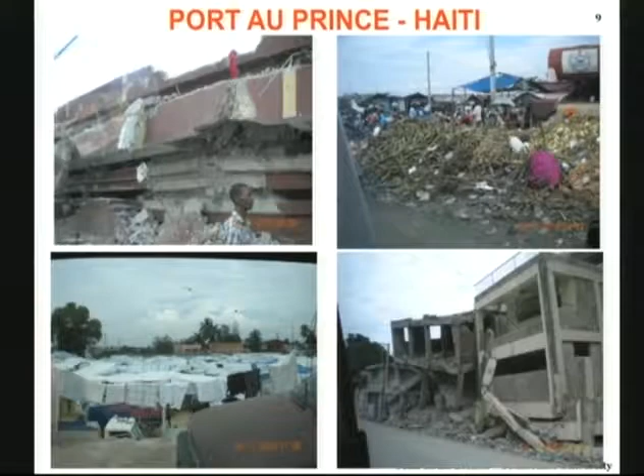Why be a member of ISSMGE? Well, it's pretty obvious. You want to help the profession at the international level. How to join? You can contact me, I guess. I'll give you more details.

Toronto, October 2011, is the Pan American Conference. This is going to be a big one, and I would urge you to consider coming to this conference. And then the next international conference is in Paris in 2013, and that should be a lot of fun.

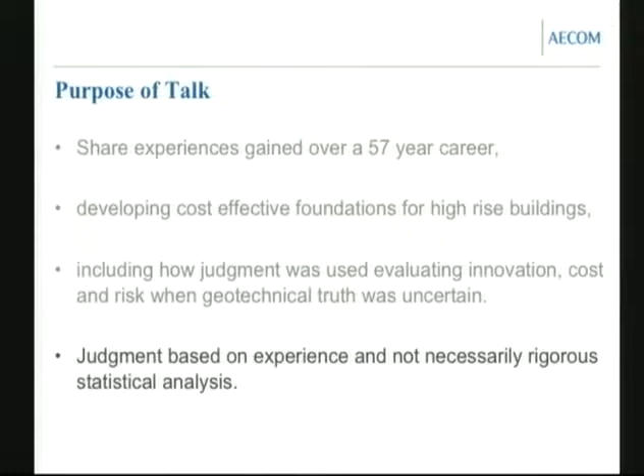Purpose of the talk: to share experiences gained over a 57-year career, which I guess now is 58 years, developing cost-effective foundations for high-rise buildings. That's what my experience has been, having been in the Chicago area for so long. Including how judgment was used evaluating innovation, cost, and risk when geotechnical truth was uncertain, with the judgment based on experience and not necessarily rigorous statistical analysis. You will see that I'm more of a practical guy than theoretical.

The major portion of my career has been spent in Chicago, which is very fortunate if you're interested in foundation design for high-rise buildings, because there are so many high-rise buildings in Chicago. One time I think we had 3 of the 4 tallest. I followed Ralph Peck in Chicago and gained from Peck's experience. You'll notice I'm wearing a bolo tie, and Peck often wore bolo ties.

The softest till sheets are naturally near the surface, and they get denser as you go down. This is a picture showing the Chicago profile and all the different foundation types that we use in Chicago. I think it's a great picture and a great profile because we use all these different foundations, and we have problems, and the geology is such that we can explain the problems.

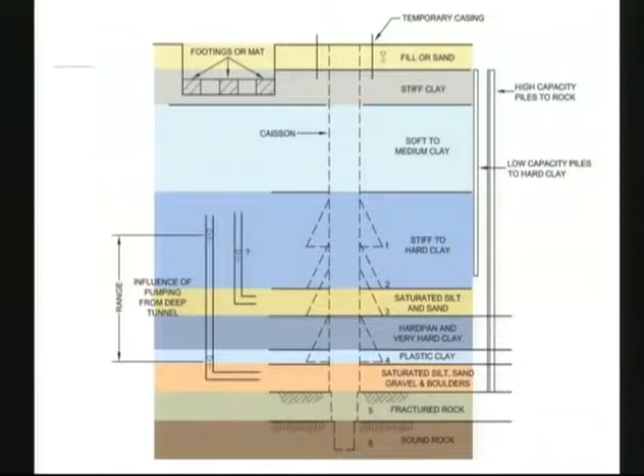At the different till sheets, we sometimes find water-bearing deposits which can blow in on us suddenly. Then we get down below the hardest hard pan, we have more water-bearing deposits, and then fractured rock, and then good dolomite.

Fortunately, because the clay takes time to consolidate, they were able to keep maintaining the building, repairing it, keeping it up so it looks pretty good. Today, you look at it, you don't know it's settled so much until you walk into it, and you step down to walk into it.

So caissons were used mostly for heavy buildings starting shortly after 1900. Then about 1919, there was a lot of concern with the bearing pressures that they were using. They were using like 12 KSF bearing pressure for the caissons. So D'Esposito, at the Northwestern Union Station, decided to run a load test.

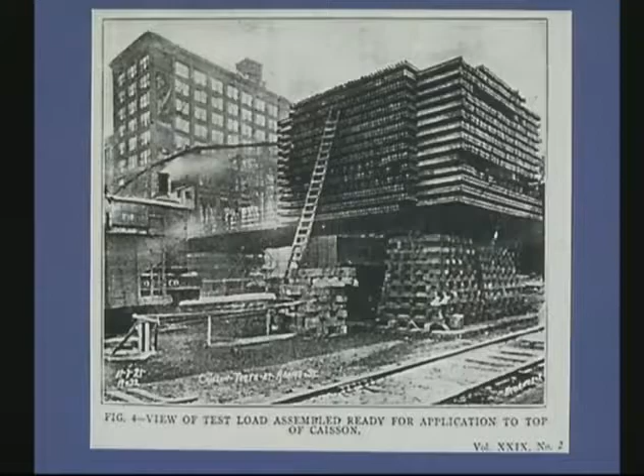This is a major load test for that day. Again, this is still very early in soil mechanics. You can see what was required to run a major load test. In those days, it took a long time to run the load test. Today we run them pretty quickly, but back then it took a couple of months to build up the load. They got it loaded up on the hard pan to about 65 tons per square foot.

But they were pretty smart, even back then, and they asked how much of the load was carried in side friction. So they dug a shaft down to the same level as the bottom of the test shaft, dug under it, and created a cavern under it, then reloaded it to see what load it could carry, subtracting that from the bearing, and still came up with some very high bearing pressures. You would think, oh boy, now we can really up the bearing pressures on Chicago hard pan.

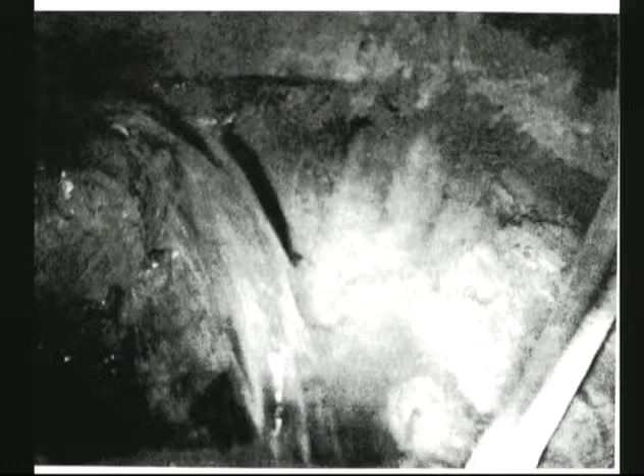Unfortunately, the 20s came along and they started building all of these 40-story structures in Chicago. All of those structures could have been supported on the hard pan, except that above the rock, and sometimes at the hard pan interfaces, you can have blow-ins of water washing in sand and silt. The experience when that first happened was that you could see ground settling adjacent to these blow-ins. Then people started to realize, hey, I might save a lot of money, but if I put my building on hard pan and somebody next to me goes down to rock, it could undermine me and cause a lot of settlement.

So in the 20s, during the big building boom in Chicago, all of those buildings ended up going to rock, and they didn't use the information they'd determined from that high load test. So then what happened? Well, nothing was built during the Depression, right? Then post-World War II.

What did we learn and how did we advance? Well, pre-1948, the allowable bearing in cohesive soil in our area was just determined by the unconfined compressive strength. Then with the Terzaghi-Peck book in 1948, the formulas shown there gave an allowable bearing pressure in cohesive soil of about 1.3 times the unconfined compressive strength for individual shafts with bells.

Then about 1955, Skempton came along with his research showing that for deeper shafts, you could go up to 9C, nine times cohesion, for the bearing capacity. If you use a factor of safety of 3, that's 1.5 times the unconfined compressive strength. And if the soil has sufficient granular component to have an undrained friction angle, you can maybe get higher values using triaxial compression tests.

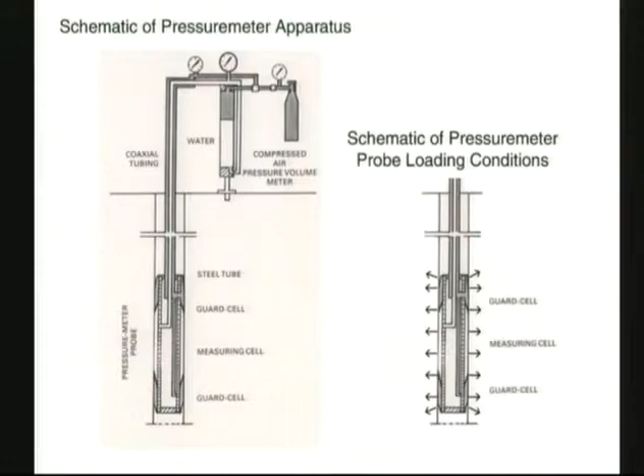We always like to see an unload-reload cycle. When we do it, we go up to the creep pressure, which is when you start to get additional deformation in the 30 to 60 second loading range, and the curve starts to curve up. That's defined as the creep pressure. Then we run an unload cycle and a reload cycle, and you get two different modulus values. In our geology, we've observed that alpha, the ratio of those modulus values, is an empirical factor that you can use very effectively.

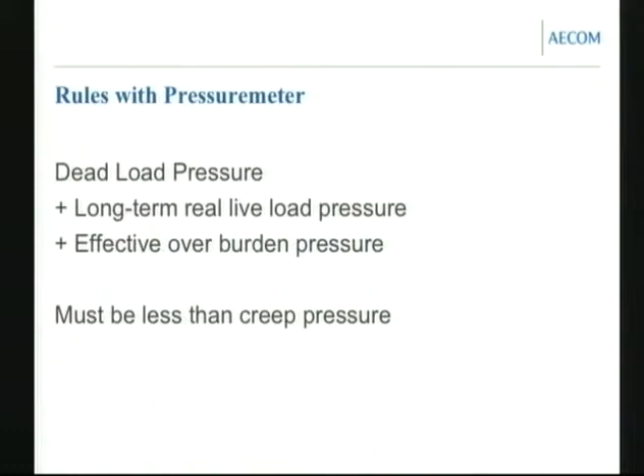Now, the rules with the pressure meter - these are the rules that we follow. We like to keep the dead load pressure plus any long-term real live load pressure, plus the effective overburden pressure, to less than the creep pressure. Now why do we want to do that? That's so we can predict the settlement reliably.

We could perhaps go a little bit higher than that, but when the stress levels go above the creep pressure, you start to get plastic creep, more than just elastic movement. So the formulas that have been developed assuming you're in the pseudoelastic range no longer apply.

Settlement theories using the pressure meter data - well, the two most common approaches are that used by Menard, who developed his procedures based on a lot of load test data that he had, and then the other approach is just the elastic approach, where you have to come up with an elastic modulus and just use elastic theory to predict the settlement.

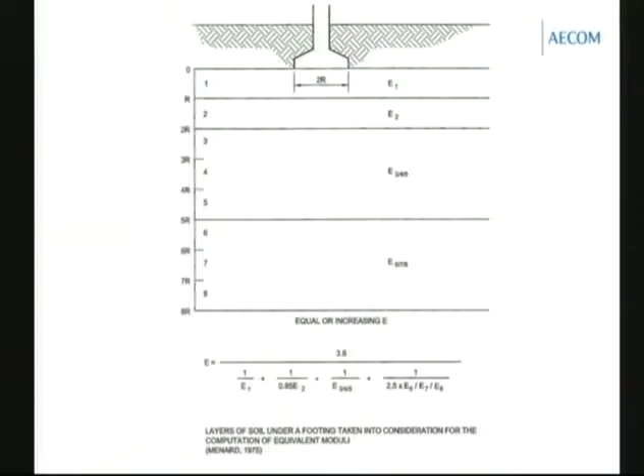Now, you can study these things later, there's not enough time to go into detail on this. But you can see Menard divides his soil up into different layers, and his formula takes into account, in a progressive way, the deformation in those layers.

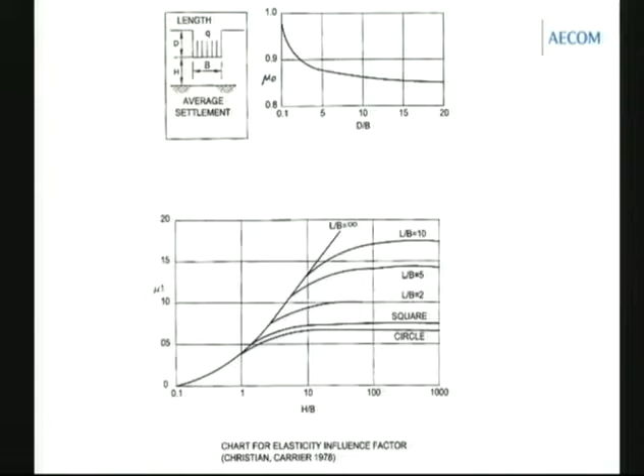And in the elastic theory approach, the settlement is just based on the geometry factors times the width times the pressure divided by the elastic modulus. The geometry factors are determined by these charts - I've got them called here Christian Carrier charts, that's where I got them from, but you can find them even earlier in other textbooks.

Pressure for more cost-effective foundations. Okay, we've got this method now where we can test the ground in situ with the pressure meter, and there's a desire to minimize the cost of foundation elements below ground that can't be seen. People want to spend the money above ground where they can see it, and not waste the money below ground where it can't be seen. That's very normal. And with the increasing role of the developer, this became even more significant.

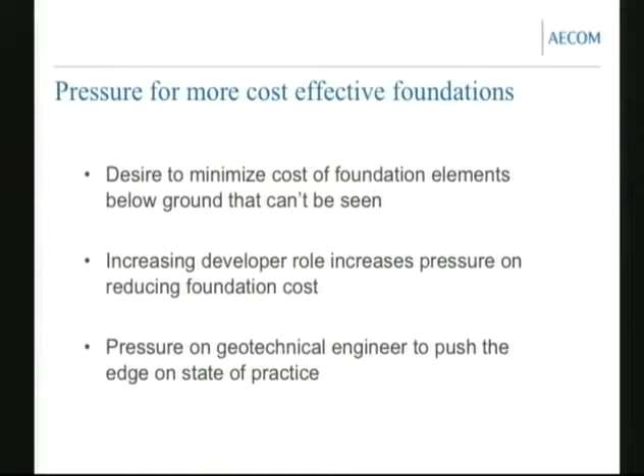More pressure to increase the bearing pressures, reduce foundation costs. And that puts pressure on the geotechnical engineer to push the edge on the state of practice, and that's where we are. Now, there's judgment required in evaluating geotechnical uncertainty and the risks involved with ideas for reducing foundation costs. We have to look at those ideas, but we have to weigh the risks, and use our best judgment in coming up with cost-effective foundation solutions.

And in all cases, we need to know our local geology and building history. We can learn an awful lot by calibrating to past performance in other buildings. And then keep in mind, we may not know as much as we think we do, and I'll illustrate something of that in my own experience.

Now, the different ways to reduce foundation costs: maximizing allowable bearing pressure, using a mixed foundation system, reusing existing foundations, using highly stressed piles as settlement reducers, and finally having a remediation plan for construction surprises.

These systems depend on being able to reliably predict your settlement. In my early days, structural engineers didn't want to mix foundation systems because they didn't have much confidence in our ability to predict the settlement.

Now we're much better at it, and we mix foundation systems all the time. Here's examples of not knowing as much as we think, and I've been involved in both of these.

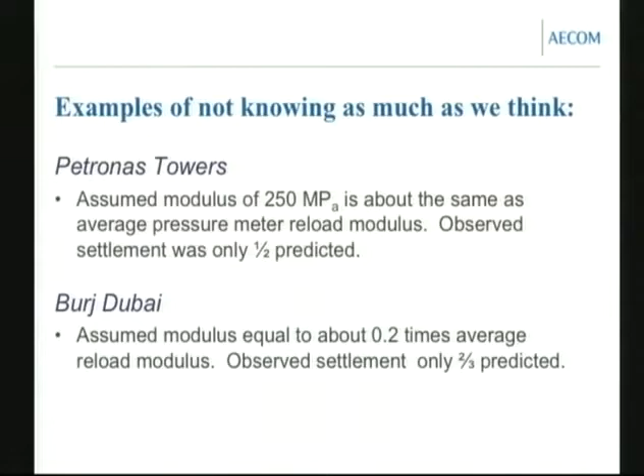The observed settlement came out to be about two-thirds that predicted. Now, if we had used our procedure that we had found successful in Chicago, the same procedure used at the Petronas Towers, we would have been way off. We would have under-predicted the settlement because the unload-reload ratio to the initial ratio at Dubai was about 10 to 1, rather than about 2.5 to 3 to 1 as it was at the Petronas Towers.

If we had just said, okay, we will use 3 times our initial modulus for Young's modulus, we would have been much closer on both cases. But our procedure was to use the unload-reload modulus, and you can see how we would have been way off if we had done that on Burj Dubai.

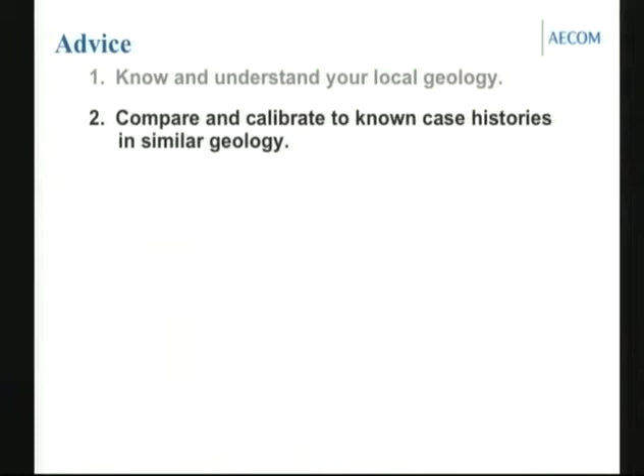Know and understand your local geology. Compare and calibrate to known case histories in similar geology. The geotechnical engineer and the structural engineer should develop the exploration program together. Perform simple bearing capacity and settlement analyses before more sophisticated finite element programs, and then perform an instrumented load test program to failure when practical.

You always want to load to failure ultimately, if you can, to really learn something. If you only go to 2 times your design load, all you learn is that, yes, you're safe going to 2 times the design load, but you haven't really learned a lot about the properties of the deposit.

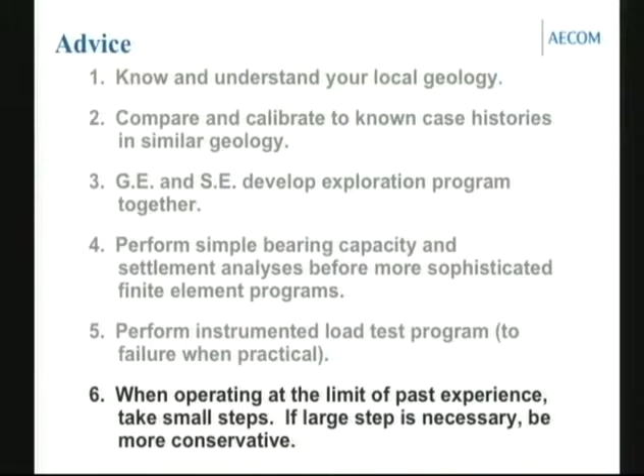When operating at the limit of past experience, take small steps. If a large step is necessary, be more conservative. Require a pre-construction contractor conference or consultation. Remember, design must be buildable. It's always important to get the contractor's input in that.

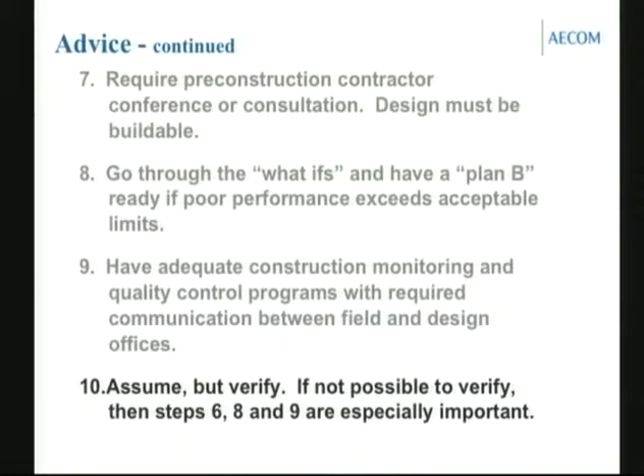If you've come up with an idea and you're pretty confident it's going to work, but there's a possibility it won't, you better have a plan B ready. Go through the what-ifs and have a plan B ready if poor performance exceeds acceptable limits. Have adequate construction monitoring and quality control programs with required communication between field and design offices. And then assume but verify—it is always good to verify your assumptions. If it's not possible to verify, then you've got to be more conservative.

Now, selective case histories to illustrate these different points on cost-effective foundation solutions—there are 5 that I'm going to show, and they illustrate different things. The first one is the AT&T building.

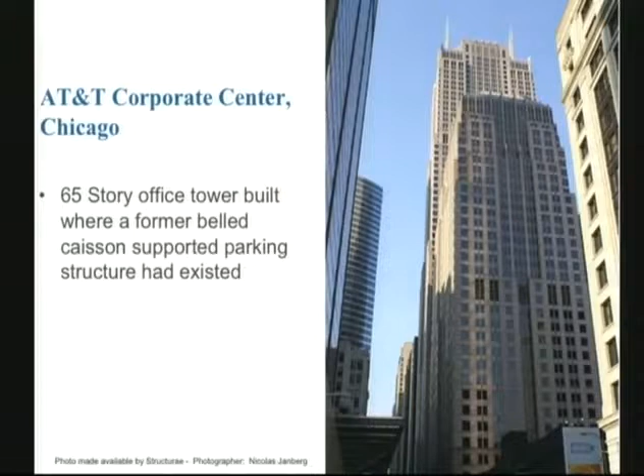This is a 65-story building, built where a former belled caisson supported parking garage structure had existed. In urban environments where you're putting up new tall buildings where old buildings were already there, you have a problem with the existing foundations. In a couple of the cases we're going to talk about, we reuse the existing foundations. Here, it wasn't possible to reuse the existing foundations, but they were in the way.

The bells are down in this hardpan layer, and of course that's where you want to sit with your new bells for a much taller structure. But you've got your existing caissons in the way. So in some cases you can go under them and get them in the hardpan. In other cases you can't go under them and stay in the hardpan—you'd be down in this water-bearing, very dense silt, sand, and gravel.

So what do you do? Well, one possibility is to put it on piles or caissons to rock. Unfortunately, the developer didn't have the budget for that, so that wouldn't work. So he asked, is there anything else we can do? We said, well, if we can dewater that water-bearing silt, sand, and gravel, we can still put the bells there. So filtered dewatering wells were used to lower the waterhead in that deposit, and it was successfully completed.

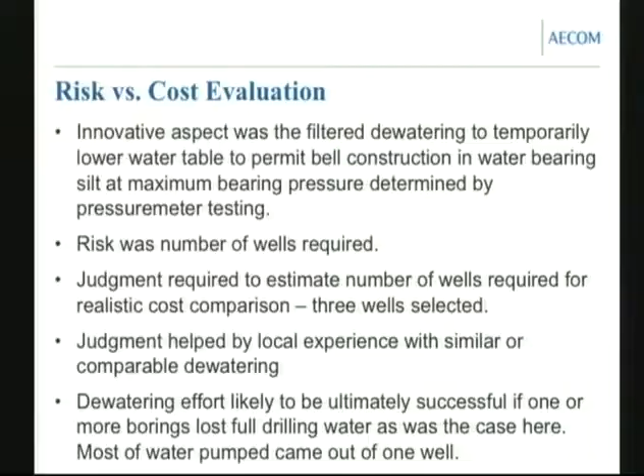What were the risks in using this solution? Well, if the filtered dewatering wells hadn't worked, we would have been in trouble—we would have had to use more wells to pull the waterhead down. But our judgment based on past experience was that the 3 wells we put in would be sufficient, and in actuality 1 well turned out to be really sufficient. We put the wells in where, in the borings, we had lost all of our drilling water, so we knew it was very permeable, and that's what you need if you're going to try that.

You need a permeable deposit that you can pull the water out, that'll extend over the site. The next one is very interesting because it was a challenge.

The developer wanted to build a new office building at the same site where an existing 11-story building had been supported on caissons, and he wanted to know how tall he could build on the same site. One of the problems was the existing building's caissons were so closely spaced that they almost took up the whole site, so you couldn't put in new caissons underneath old caissons like we tried to do at AT&T. But there was a 3-level basement on this site.

So the idea was, if we take advantage of that 3-level basement excavation—the amount of soil and weight that had been removed—and then put a mat over all of the existing piles, we could build on that combination of mat on existing piles, taking advantage of all that load that had been removed in the basement excavation.

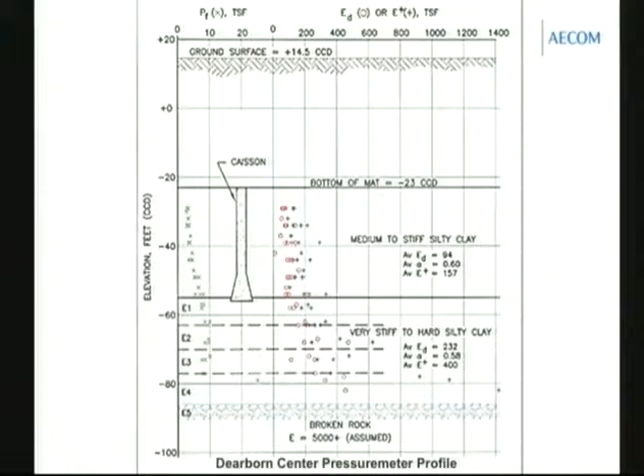Using the pressuremeter data, we calculated the maximum sustained load that can be carried by existing caissons without exceeding the creep pressure. Now, these were 100-year-old caissons, designed long before the pressure meter existed. We thought, using our pressure meter today, we could probably load them higher than they were originally designed for without exceeding the creep pressure—and that's true, we could.

So we determined that amount of settlement to be about 1 inch, then calculated the amount of pressure the mat can take for a comparable settlement, and combined them. Combined loads at equal settlement represents the maximum sustained building load that can be applied. Using that approach, we went from the 11-story original building to a 38-story new building.

How did it actually work out? With the full structure dead load in place but the live load not yet in—estimated at 70% of the total design load—the predicted settlement would be about 0.7 inches. It was all based on a 1-inch total settlement, with a range of maybe 5/8 to 3/4 of an inch.

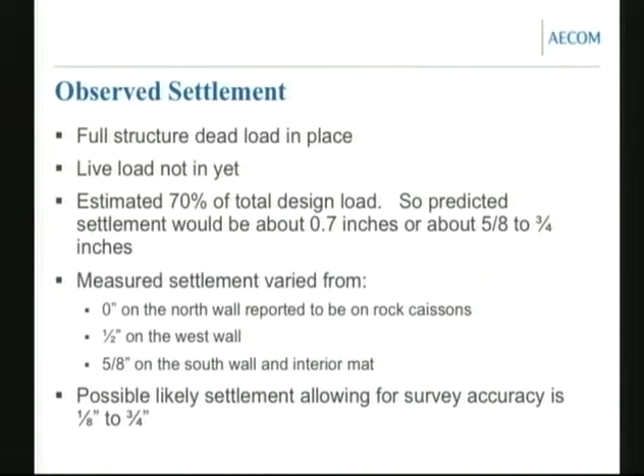The measured settlement varied from 0 on the north wall, which had rock caissons, to about 1/2 to 5/8 inch in the rest of the project. Allowing for surveying accuracy, the real settlement was probably between 1/8 inch on the rock caissons to 3/4 of an inch elsewhere—so the right ballpark for most of the project.

Now, what are the risks? I can tell you the project worked out very well, but what are the risks? The principal risk was under-predicting settlement—existing caissons could be pushed into the ground with pressures exceeding the creep pressure, making them act like settlement reducers. And with a corner of the building on rock caissons, excessive differential settlement could require supplemental micropiles in the mat and/or stiffening walls to control differential settlement, perhaps even both. Judgment was that the value saved by the combined foundation design was worth the risk.

South Side office building. You can see on this previous one we're reusing existing foundations. Now this South Side office building illustrates using settlement-reducing piles in an unusual way, and you'll see what I mean. On this project, it's only 10 to 12 stories—it was going to be 12 stories ultimately, but initially only 10 stories, and it's built.

There's a sand layer, then a stiff clay crust, then fairly extensive, very soft clay. And where we would normally have hard pan, there wasn't any. Instead there was a thin layer of stiff clay, and then very dense water-bearing sandy silt. So the desirable plan of putting in belled caissons couldn't work because of the possibility of a blow-in from the water-bearing sand and silt below.

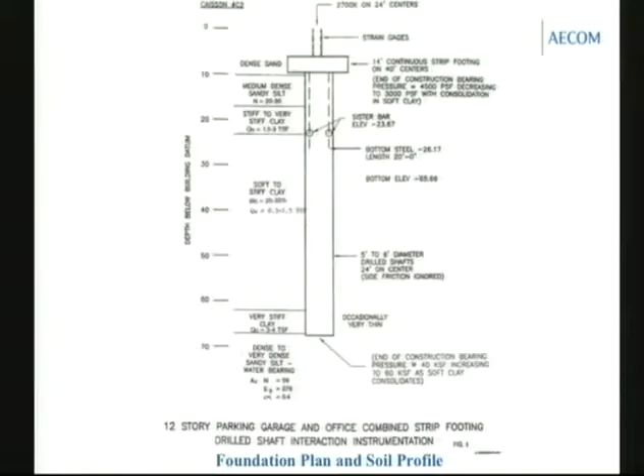But if we could go down with a straight shaft to this very dense deposit, we had run pressure meter tests down there, and with the concept of settlement reducing piles, you can allow that load down there to go up close to failure, because you're not relying on the pile as a structural element.

The idea when you're using settlement reducing piles is that the purpose of the piles is to reduce the settlement, and the project would be safe without the settlement reducing piles—you're just using them to reduce settlement. The reason why that's important in Chicago, and anywhere really, is if it's a structural element, it has to be load tested, and load tests slow down the project and add a lot of cost. If it's just a settlement reducing pile, you look at it as ground reinforcement, not a foundation element that has to be tested in the same way.

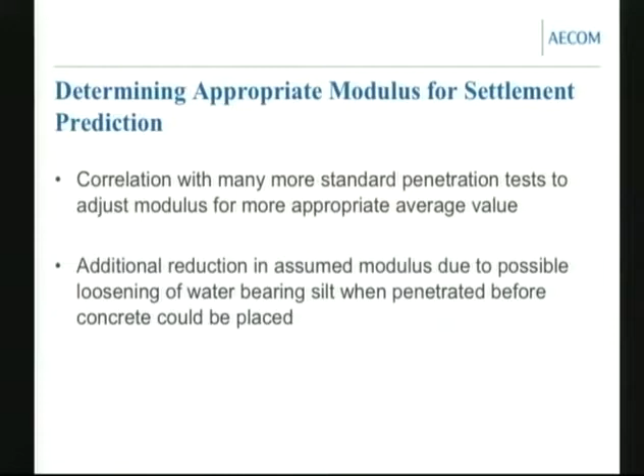We instrumented two shafts—one was at the edge of the footing, and another was an interior shaft. And it's interesting to see that, normally you would think the interior shaft would settle the most.

In actuality, the edge shaft settled the most. And the reason is when you think about it, you don't have that footing extending beyond the edge shaft carrying its share of the load. You only have the footing in the other direction carrying its share. So you get major settlement at the edge shaft and less settlement at the interior shaft, where the footing is carrying more of the load.

The actual bearing pressure turned out to be under the edge shaft, calculated to be 76 KSF, and at the interior end shaft, a little under 50 KSF. Normally, if we were doing a design with the pressure meter and these elements were going to be designed as structural elements, we would have probably limited the bearing pressure to no more than 40 KSF.

So here, by considering these elements as just settlement reducers, we were able to go to much higher stress levels.

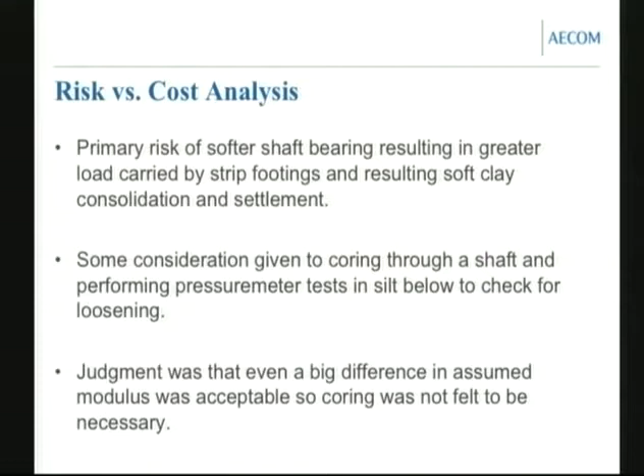Risk versus cost analysis: the primary risk of softer shaft bearing resulting in greater load carried by the strip footings, resulting in soft clay consolidation and settlement. Well, why didn't we core through a shaft and actually see what it was like below? Some thought was given to that, but we finally decided we'd been conservative enough, and that we could go forward without taking the time of doing that additional coring through a shaft and testing below it. I suspect we were under a lot of pressure by the contractor and developer at that point too.

111 South Wacker Drive. Now this was another one of these projects where there was an existing building - tells you what happens when you're in the business long enough. The building that they tore down, I was the original geotechnical engineer on. I was the guy that went down in the caissons to look at them and say that they were okay. In those days, the engineers went down in the caissons, didn't send a technician down. We went down and looked.

So we came up with a plan that involved putting a mat over those existing caissons and enough new caissons that would go down to the hardpan, that in combination with the existing caissons, they'd have to go below the existing caissons. And actually, by going below the existing caissons, they got into better hardpan. The question was, do we have enough thickness above the water-bearing silt? And we did.

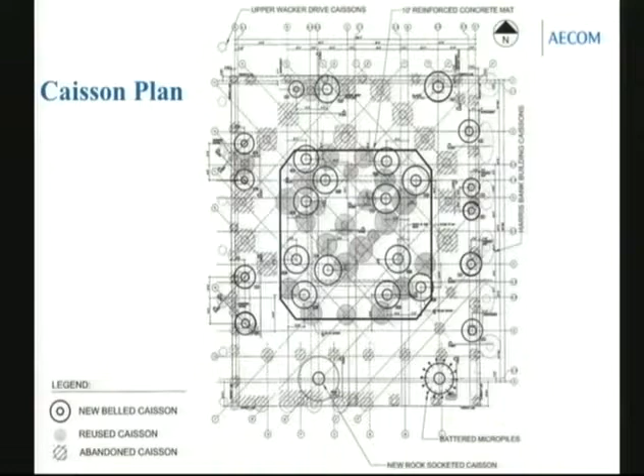Problems and remedial action. I mentioned the unanticipated water problems encountered at 2 caissons and how we resolved it. Now, the interesting thing is the 14 rock-socketed micropiles in Chicago - if you use piles, you have to load test them. So we didn't load test them because we convinced the city that they were just supplementary, and that we were using them as settlement reducers, because we calculated the elastic compression in the steel of these micropiles, and it was sufficient that the amount of settlement would, at a reasonable bearing stress level, be in balance with the as-built caisson, so that it would work. We convinced them that we didn't have to do the load testing of the micropiles.

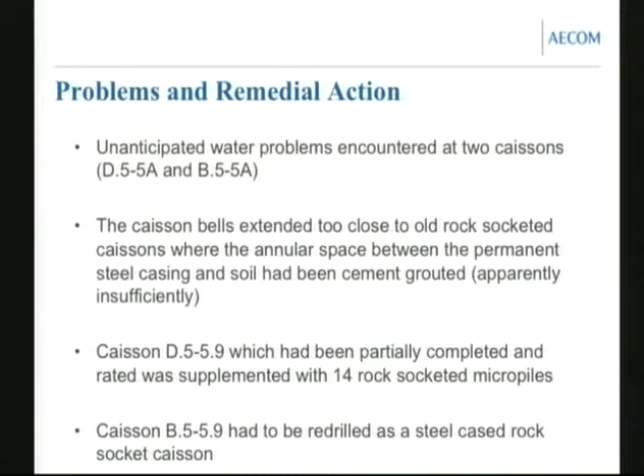On the rock caisson case, we don't have to load test rock caissons. You do have to case them, permanently case them down into the dolomite, and test the dolomite, and that was done on the rock caisson.

How did it all work out? Well, it worked out very well. The settlement predictions were typically 1 inch or less, and the observed settlements were typically less than 1 inch. And it was interesting - where would you guess the maximum settlement was that was measured?

It was on the caisson that went to rock. Now, how can that be? How can the caisson going to rock have the maximum settlement? Well, it's always possible in our dolomite to have seams and fissures that are missed, and you can get a little settlement in closing up the fissures. When I say a little bit of settlement, that maximum settlement for that caisson - the total settlement was only 0.88 inches, so it wasn't a lot, and it compared with the rest of the project where the measured settlement was in the 0.5 to 0.8 inch range.

So everything fell into the same general ballpark. What were the risk versus cost evaluations here? The risk versus cost of reusing existing caissons were considered negligible, as complete as-built records were available. The risk of new caissons getting too close to underlying water-bearing silt and blow-in occurring - we didn't think that would happen, but if it did, we would have to use filtered dewatering wells to lower it, like we did on the AT&T building. But we didn't think it was necessary here, and it turned out it wasn't. The internal lateral blow-in that did occur wasn't anticipated, but you've got to have a backup plan, and we had a good backup plan for both caissons where the lateral blow-in did occur.

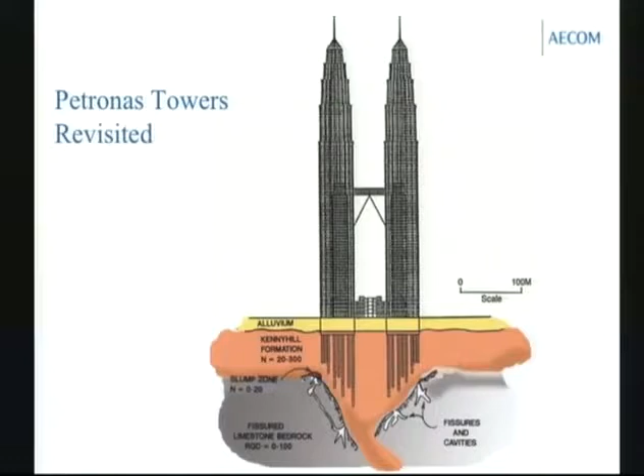In the Petronas Towers, we did a preliminary settlement analysis, what I call approximate analysis using approximate methods, and we came up with a predicted settlement, using the pressure meter data. We come up with a settlement calculation using the elastic theory of almost 60 millimeters. Then you've got to add the elastic compression in the shaft down to the equivalent footing level, which adds another 14 millimeters. The total predicted settlement using elastic theory then is up around 73 millimeters.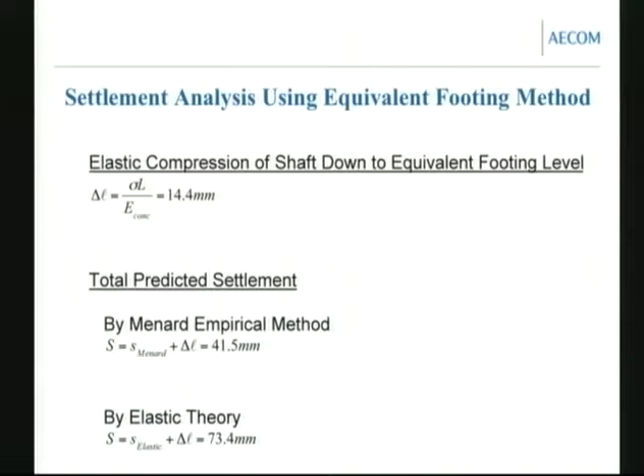However, using the Menard method and his empirical method, the total settlement came up to about 41 millimeters. Now, what was the actual settlement? The computer-generated settlements are also up around 70 millimeters, but for the computer-generated settlement, we had to do this differently - you couldn't do it by approximate means because of the sloping rock and everything.

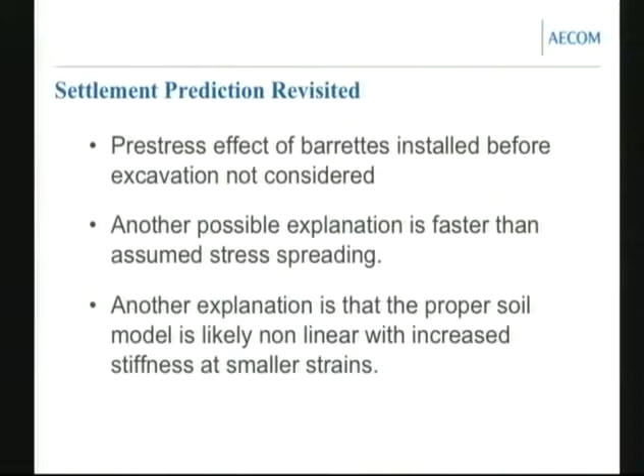Hindsight evaluation of cost-saving foundation idea: why not consider piles as settlement reducers and allow much higher concrete stress levels, with only slight increases in predicted settlement, with reduced concrete cross-section? We got very dense residual soils - our mat is sitting on very dense residual soils. We don't even need piles except for settlement. In other words, there's adequate bearing capacity, so it's sort of a perfect case for using settlement-reducing piles.

The factor of safety is adequate - I'm sure it would be more than 2 for a mat only. The problem is that using it as designed, using those piles as designed, following code allowables and everything, and the stress levels in those piles, we still just barely made it settlement-wise - just barely made it the half inch across the mat.

If we had increased the stress levels in those elements, let's say we could double the stress level in those elements - if we're now looking at those elements as settlement reducers or ground reinforcers, not necessary for the structure but just to reduce settlement - we could double the stresses in those piles, make them half as big. Well, of course, if you do that, the elastic compression in those piles has to be added to your settlement, and they're variable length piles. We would not have stayed within our half-inch maximum criteria across the site.

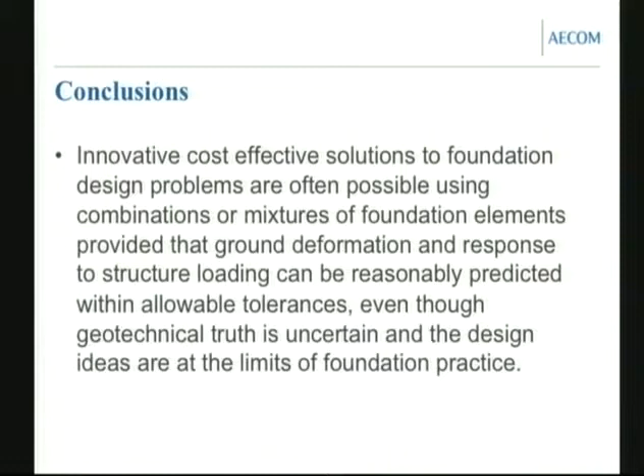Conclusions: innovative, cost-effective solutions to foundation design problems are often possible using combinations or mixtures of foundation elements, provided that ground deformation and response to structure loading can be reasonably predicted within allowable tolerances. Even though geotechnical truth is uncertain and the design ideas are at the limits of foundation practice, the key requirements are geotechnical engineer and structural engineer teamwork, knowledge of and experience with local geology and past building foundation performance history, or being more conservative where such information is not available.

Having experience with use and interpretation of in-situ pressure meter testing, or whatever method is used for predicting ground deformation under load in a particular geology, and having a plan for addressing geotechnical surprises. And then finally, being more conservative when assumptions can't be verified. The end.

Do you have any questions?

With pressure meter testing, you have the creep limit, that's lateral, radial lateral. Regarding Poisson's ratio, would you expect the vertical to be greater than lateral? I said I wasn't theoretical, I'm using an empirical method that works in a particular geology. We have professors here who could answer the theory, but I really can't. I understand the theoretical limitations that way. It is a lateral test, not a vertical test. But in soils with isotropic properties, at least, it's certainly been very, very useful, and we're using it all the time.

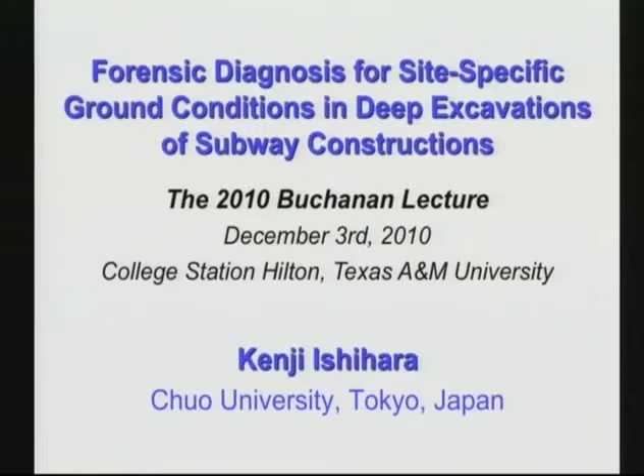And when I was the president, he made a proposal, and he was so enthusiastic and so outstanding, actually I had no choice but to accept it. Today's talk is entitled Forensic Diagnosis for Site-Specific Ground Conditions in Subway Construction.

As a matter of fact, in 2005, December 4th, there was a big accident in Kaohsiung in the subway construction. At that time, Dr. Wei Li was Secretary General investigating the cause of the damage, and he asked me to join the panel of experts in Taiwan. Then I accepted it, and I learned a lot from the accident.

And then in 2008, April, there was a conference, an in-situ conference in Taipei. At that time, everybody in Taiwan, geotechnical engineers, wanted to have this accident presented at the time of the conference. However, because I was considered a very neutral man, they asked me to make a presentation. So then I did some studies.

So this is the basis of today's presentation. In addition to that, I got a lot of information from Japanese engineers and from Professor David Hight on the collapse of a subway in Singapore. So these are the two big ones. The third one is another big one in Shanghai. So there have been three major accidents in the Asian region, or I must say, in the world in the 21st century, related to subway construction.

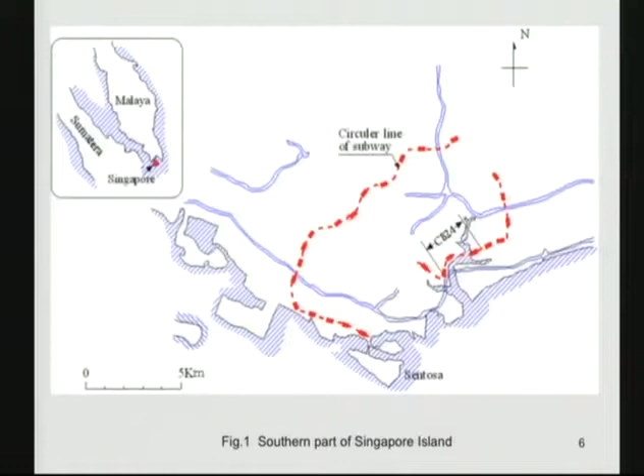The accident took place in this section in the new subway line under construction. This is an enlarged map. This is the Kallang Basin inlet to the south. This is the new line under construction, and the construction was under progress in this section, which is called Nicoll Highway. The collapse took place at this location.

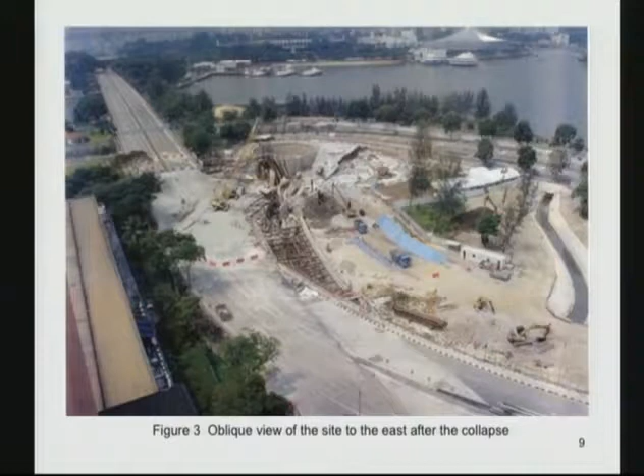This picture was taken immediately after the accident, which took place on April 20th at 33 minutes past 3 o'clock. Fortunately, there was not much traffic on this Nicoll Highway, so nobody died in this accident. However, in this portion, the workers were still struggling to recover from this accident, so they were involved in the collapse, and four persons died. This picture shows the detail of the collapse.

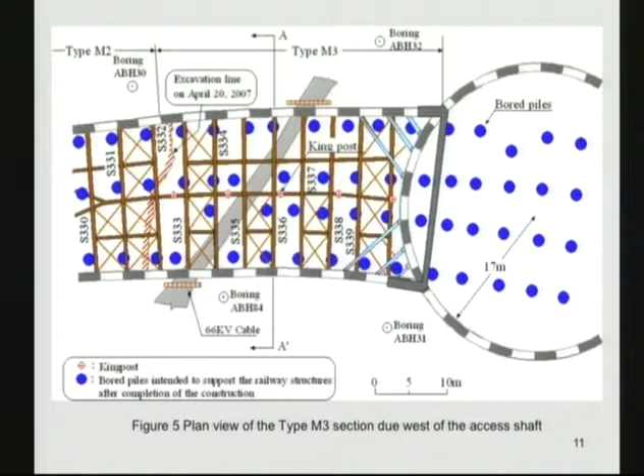First of all, engineers installed a diaphragm wall as well as the bored piles, and also there are two jet grouted struts. The upper one was to be taken away because the excavation was supposed to go down to a depth of this location. You can see two measures of the height.

This indicates the depth counted from the ground surface. In many countries, the elevation was taken at 100 meters below the average sea level, and the elevation counted starting from that 100 meters deep. So there is 6.9 meters, 4.2 meters, and so on. This is the elevation counted from 100 meters.

This jet grout is called sacrificial grouting. That means it is a temporary support, but after installing the steel bracing, it was going to be taken out by excavation.

At the time of the accident, 3:34 p.m., the scenery of the accident looks like this. As you can see, there is a huge amount of soil slid down into the excavated space. At 3:41 p.m., that is 7 minutes after the accident, everything looks like this.

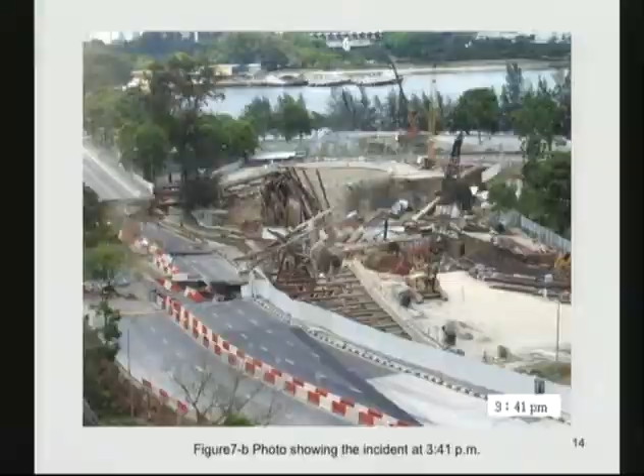Partly the Nicoll Highway was involved in this accident. These pictures show the spreading of different construction materials. There is an apartment house just behind. This picture shows the installation of the jet grouting from the ground surface prior to excavation.

Jet grouting has been used quite frequently, but its quality is very important, and its quality depends upon the skill of the contractors. At the time of the design and feasibility studies, several borings were performed to investigate the soil condition, for example ABH 31, 84, and also 30 and 32. The contour line was drawn based on the soil boring, which was performed at about 20 or 30 meters interval of distance, which is considered normal.

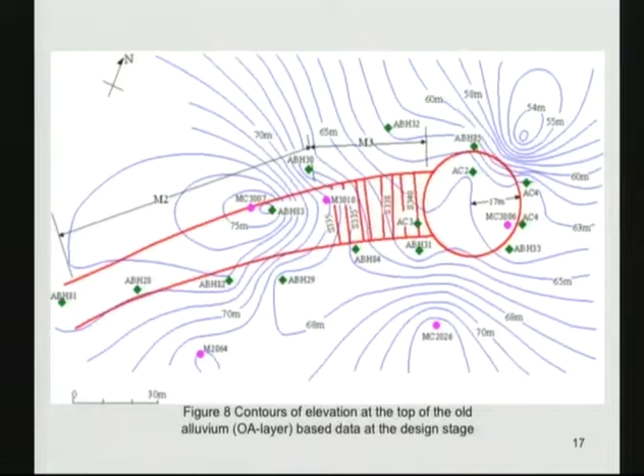If you look at the boring data on 30, located here, it looks like this, indicating fill materials near the surface underlain by silty organic clay, and further underlain by a very thick stratum of marine clay, designated by M. Then silty sand and silty clay layers exist below this, and an OA layer exists below this soft marine clay deposit. This was considered as a basis for diaphragm installation.

The other boring data, ABH31, located just here, indicates a similar ground condition, except that there are stiff materials in between, but overall this layer is considered the Kallang marine deposit.

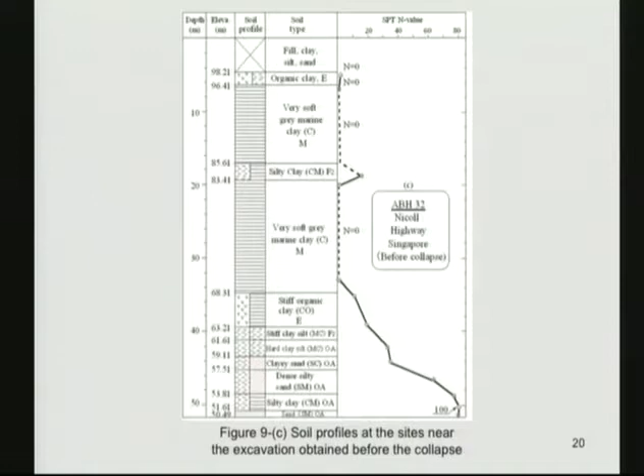The other boring data, ABH32, shows similar stiff materials in between, underlaid by a gradually increasing alternating layer of sandy silt and silty sand, called OA as a whole. This is ABH84, closest to the position of the failure. It is particularly notable that the depth of this bearing layer is deeper than the other portions.

So it is suspected that the diaphragm wall toe did not reach the stiff OA layers. According to the design, the diaphragm wall should penetrate 3 meters deep from the top of the OA layer.

After the failure, a lot of investigation was conducted, consisting of 2-meter interval borings on the northern side, and also along the southern alignment. There was a borehole where they encountered a lot of obstacles because of buried machines and so on. After the accident, everywhere was buried, and a new line was planned on the southern side.

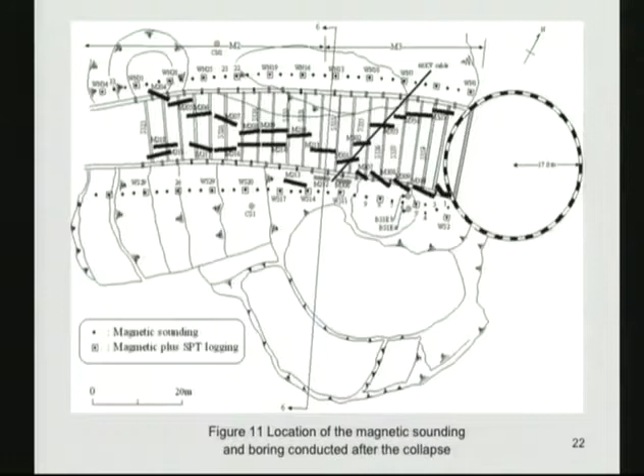So there was no exactly verified data regarding what kind of bracings and diaphragm existed. This is just based on surface observation of the diaphragm panel. These two were buried.

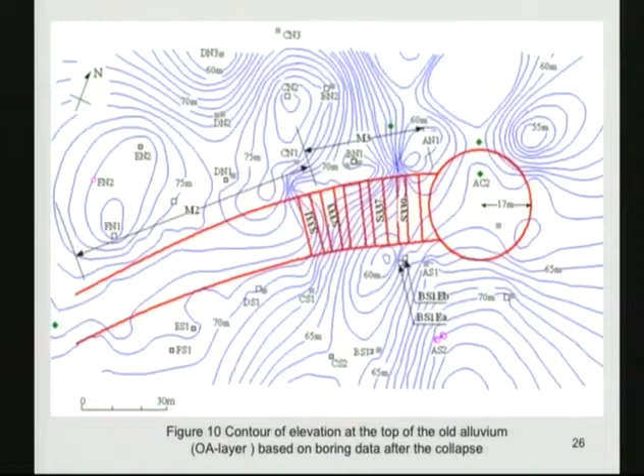After the accident, based on a lot of additional borings, contour lines were drawn again. If you compare the contour lines in the previous diagram with this one, it is apparent that there is a very steep slope in the buried OA layers along this way, extending towards the north. But this buried valley was missed at the time of the design and feasibility study. That was the major reason why this kind of big accident must have taken place.

After the collapse, several borings were made, and this is one of the after-the-event soil profiles, indicating a very stiff material, which might be hard cement, grout, or metals, and so on. This is a similar soil profile data after the accident. This also shows the same diagram.

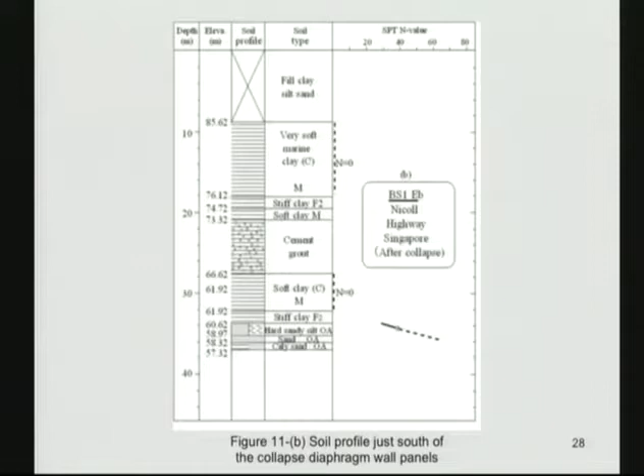So the toe-in, the length of the diaphragm wall penetrating into the stiff layer, was suspected to be the cause of the damage.

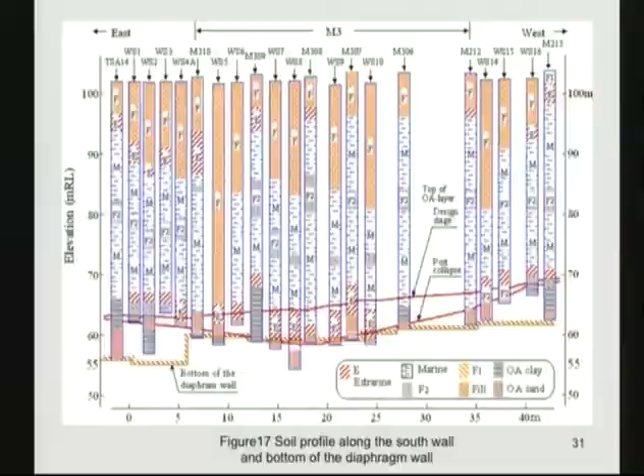So you can see the diaphragm wall penetrate pretty deep below the top of the OA layer. But if you look at the critical areas, there is an estuarine deposit designated by E here, and also this OA layer, but the strength was not good enough. So because of the lack of penetration of the toe of the diaphragm wall into competent material...

The movement of the toe must have taken place inward towards the excavation. On April 20th, 2004, excavation was going on from this area to here, advancing westward at this location at the time of the accident.

In the morning of the same day, there was the sound of metallic collision heard around here and here. But at 2 o'clock in the afternoon, the metallic collision noise became more frequent. So workers within these strutted areas started to feel the concern on this joint and so on, but it was too late, and the countermeasures were not helpful.

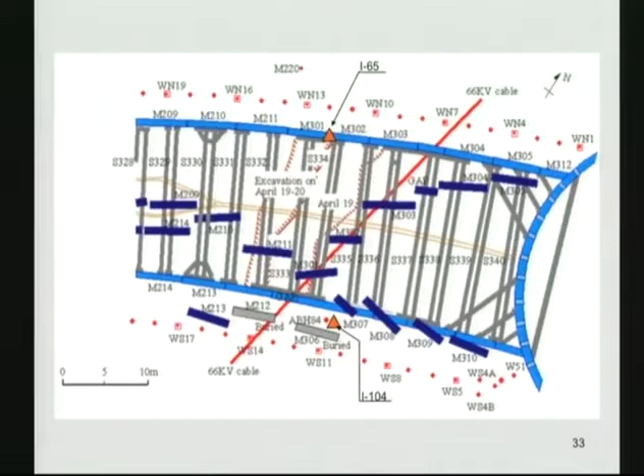There was an observation of the inclination at this location before the accident, and I will show you the records, which look like this. On the 17th of March...

Displacement of the strut started to increase, reaching a level of about 43.5 centimeters at this location on April 20th, at 1 o'clock in the afternoon.

However, we should be careful looking at this data. Normally, this is established based on the inclinometer data, which gives the angle of inclination. Based on this data, this curve was established, but assuming that this is a zero point...

So this is a very tricky distribution. Engineers at the site showed that this point must have moved further towards the excavation, bringing the toe of the diaphragm wall towards the excavation, and this must have been a generic cause of the damage.

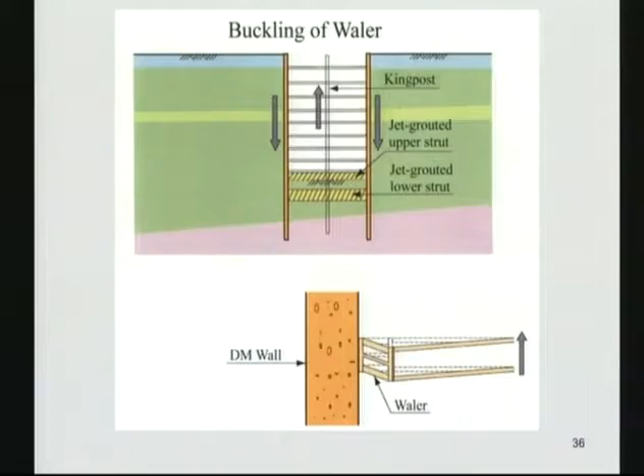According to the report of the Committee of Investigation, which was publicized one year afterwards, the cause of the failure was attributed mainly to the overestimation of the soil strength around here, and also the poor design of the sheet piles and strut and welding and so on, and the calculation was not so good.

But later on, in-situ engineers felt great doubt about this. So he invested a lot of money to investigate further site conditions by making borings.

This is the brace system before the accident. So one of the lessons we should take seriously is the connection between the strut and king post, which is normally rigidly connected here.

So if the king post goes up, the strut should go up also. And if the diaphragm wall sinks, the strut was bent, and there was some breakage at the connection. This is one of the bad experiences we should keep in mind.

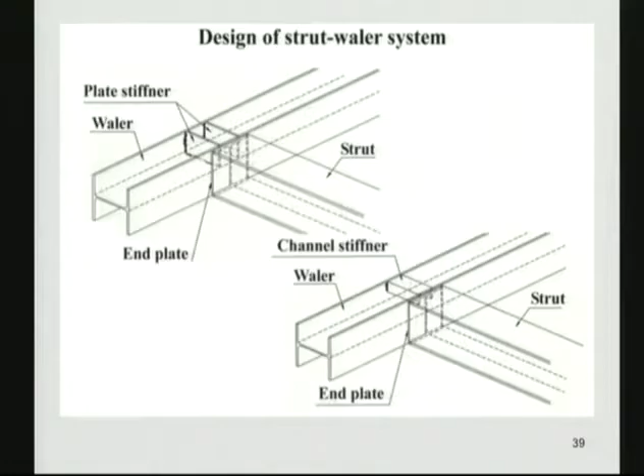So this indicates the configuration at the strut. In order to reinforce this connection, they put additional plate stiffeners in this fashion, and also channel stiffeners in this way, but it was not useful. One of the scenarios of failure is as illustrated here.

Because of the inward movement of the diaphragm wall, soil moved upwards inside, bringing the king post upward together, and then there was a disconnection, an imperfect disconnection between strut and walers. So this was the cause of the initiation of the damage.

So there are two scenarios. Scenario A is the larger earth pressures than assumed in the design. Due to the overestimation of the soil strength, the deformation was calculated smaller than actually happened, and then the collapse might have taken place because of the larger earth pressures than anticipated.

The other scenario, number 2, is what I explained here, based on the upheaval of the materials, bringing the king post upwards, and then there is the breakage in the connection. We believe scenario B appears to be more realistic. However, it is still under argument.

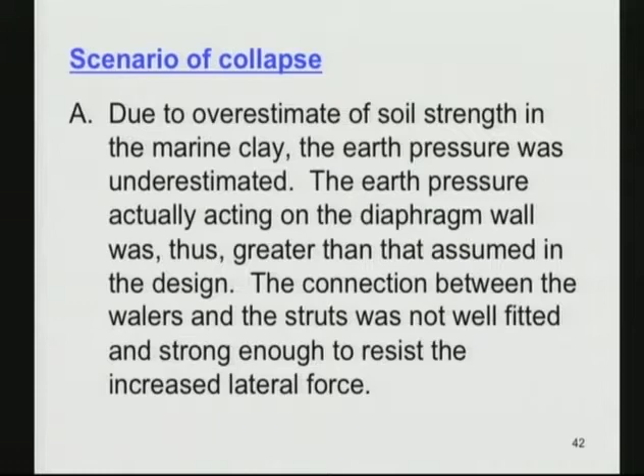The earth pressure actually acting on this diaphragm wall was greater than that assumed in the design. The connection between the walers and the struts was not well fitted and strong enough to resist the increased lateral force. The toe-in of the diaphragm wall specified to be 3 meters below the top of the stiff OA layer...

...appears to be achieved, but because of the presence of a weak zone near the top of the OA layer, the toe of the diaphragm wall moved inward, causing upheaval of the bottom of the excavation, accompanied by the lifting of the king post and also by the sag of the diaphragm wall itself. Thus, an offset was produced in the connection between the walers and struts, resulting in malfunction of the bracing system.

Okay, this is the end of the first story.

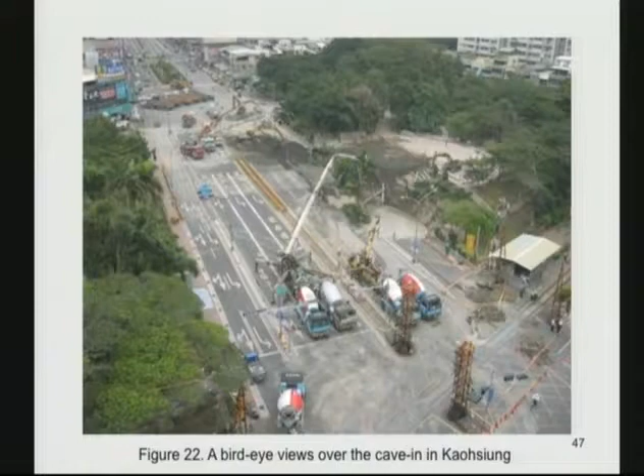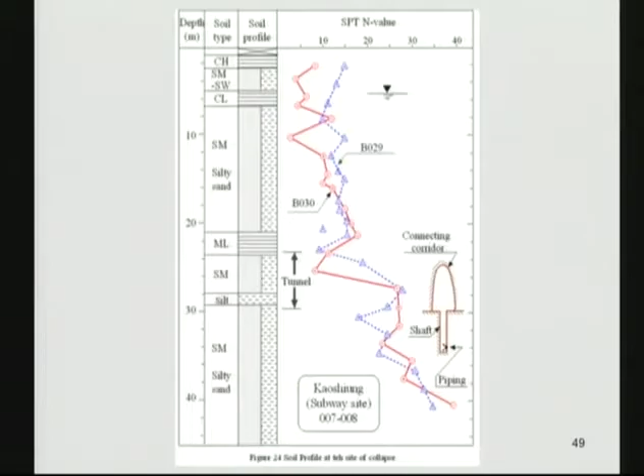And when the water collecting shaft or sump was under construction, there was a piping which occurred at this location. After minutes of piping, two engineers, workmen, were at the bottom of the pit. They tried to put the sandbags and so on, but it was not possible.

The black-colored water came in, and eventually they gave up, and they went up, and they looked down. They testified that the sandbag was floating like this, something like clothes in the wash. So this is another view, looking down, showing the sandbag and so on.

This is the rubber... well, when the caving propagated and reached the level of the ground, it destroyed the water supplying main, allowing a lot of water to come in. It was not possible to stop this water inflow almost 12 hours after the accident.

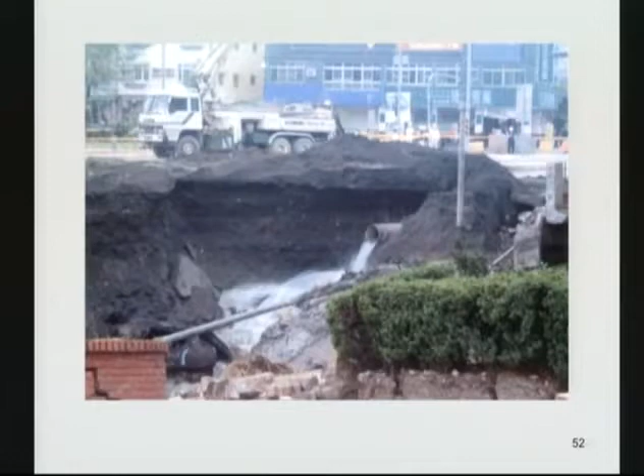And then followed by the waters piping into this space, and gradually it increases, bearing all the spaces. So engineers went off and put very stiff lid at the opening, and then there was a support.

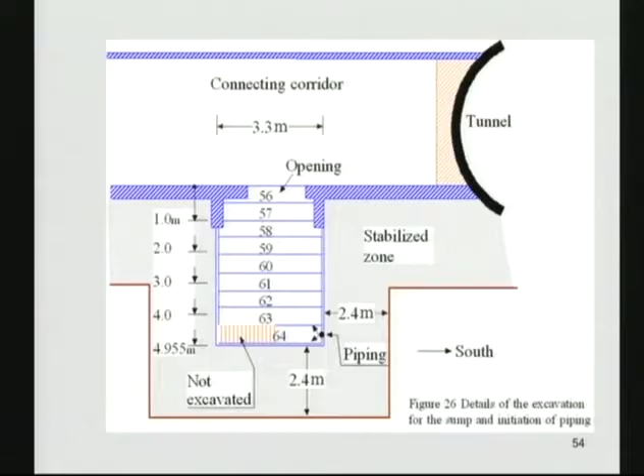However, the leaching started from here, propagated in the outer zone, and then the tunnel shield segment started to deform, and water started cascading from the ceiling into the already completed shield section. Then it propagated finally to the ground surface.

This is a series of pictures I have drawn for illustration. At the beginning, this is the starting point of the seepage failure due to internal erosion of the material. As you can see, this is 2.4 meters. However, it is highly likely that the water, mud water, came from the bottom towards this already completed water sump.

Because when we solidify the materials by jet grouting, it is not conceivable that the water will migrate horizontally. Most likely it will come from the bottom upwards, vertically. This is a stabilized zone. This is a shield tunnel, corridors and sump. And this is the roadway on top of this shield machine.

As you can see here, there is a 6 centimeter diameter water supply main pipe, which also collapsed, supplying a lot of water into the already completed shield tunnel. This is the second stage of the failure progressing from here to here.

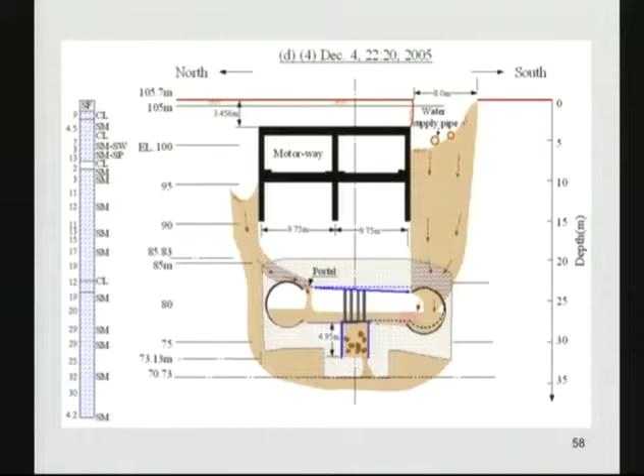At the same time, because of the tilt of this connection, there was an opening at the joint, and then there was another water-saturated material coming in from the northern side. Eventually it became like this, involving the collapse of the water main near the surface, supplying a lot of water into the shield tunnel.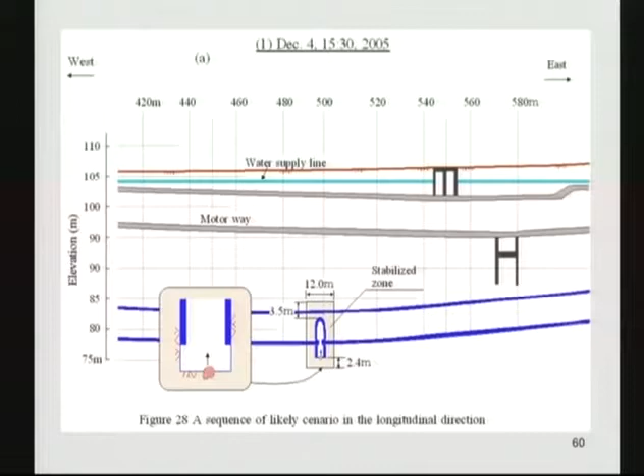So if we imagine this series of things in the longitudinal direction, it looks like this. First of all, the piping took place at this location. This is an enlarged map. This is a shield tunnel already completed. This piping supplied mud waters into this hole.

As a matter of fact, every engineer testifies that the material in that region is very black, containing black non-plastic silt, and once this silt smears the shirts, the black smear cannot be washed away. So this is a particular material, I guess.

So this is the third step of illustration, involving the flow down of the materials through the breakage, the broken pieces of shield segments, into the already constructed tunnel. So the eventual situation of the collapse looks like this.

I should say this cost almost, say, $10 to $20 million for repairs. The previous Singapore collapse claimed much more money, amounting to more than $100 million. So...

I would like to attribute this accident to the shortage of soil investigation. If the soil investigation had been done more in detail, and the study had been done on the soil properties, this kind of accident might have been avoided.

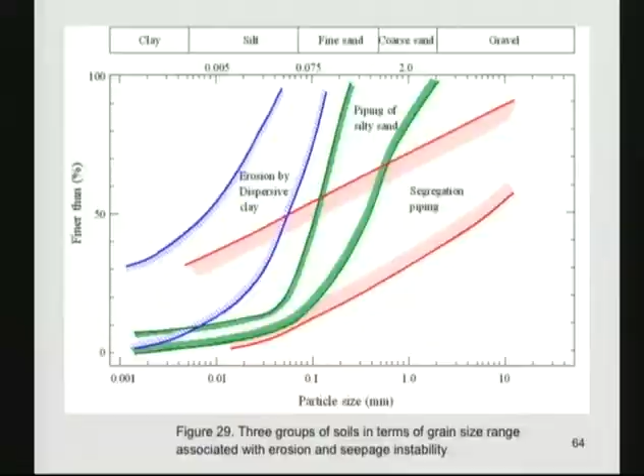But this is associated with this green grain size distribution. What we observed in Taiwan doesn't belong to either of these gradings, it belongs to this area in between. So we thought this is a new area to be studied, or to explore its mechanism.

At this moment, Professor Wei Li is now constructing a new simple shear, direct shear apparatus, where some flowing seepage is allowed from the top to the bottom, and then shear deformation is applied afterwards or beforehand.

A simple test has been done at that time, as shown in this diagram. This is a soil sample, only 4 centimeters in height and 5.17 centimeters in diameter, covered by gravel upwards and gravel downwards, with a filter mesh. Water pressure of about 98 kilopascal is applied, and water is allowed to flow through a small 3 millimeter hole dug at the beginning.

This is generally called the pinhole test. The specification is given by the ASTM standard. After allowing water to seep, it was possible to watch the water colors.

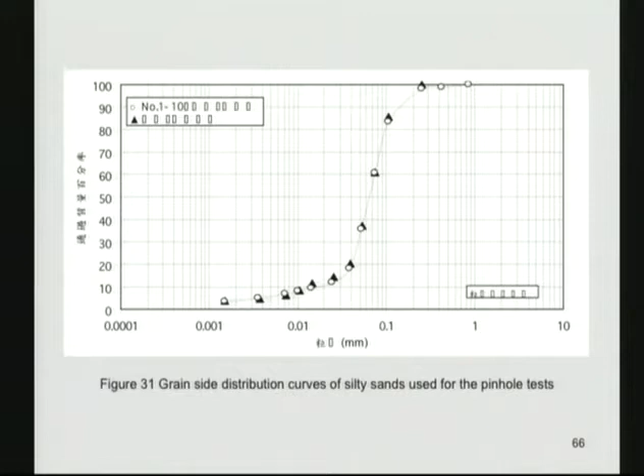For comparison, we took another sample from a Japanese site of tunnel construction where the grain size distribution looks almost the same. The white marks indicate Kaohsiung, and the triangular marks indicate the grain size distribution from the Japanese site. This is just the grain size distribution curve comparison between Kaohsiung sand and Japanese sand.

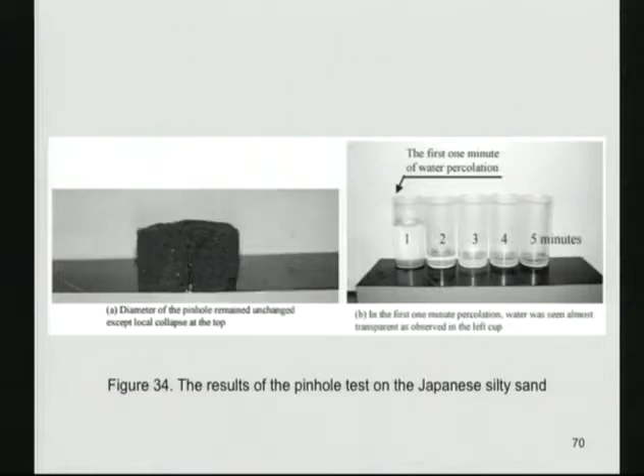This appears to indicate that Taiwan silty sand has a special silt which is very erodible internally. This is a similar test performed on Japanese sand, where you can see there is no turbidity, no color change. The Kaohsiung sand was also tested in the same manner, but this refers to test results on undisturbed samples.

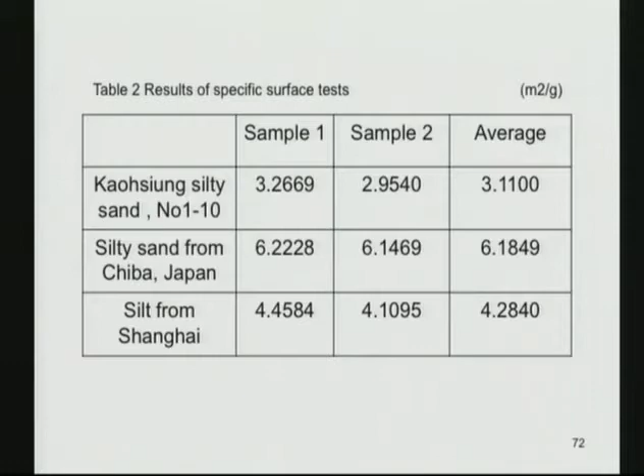Another thing we measured is the specific surface, defined as the surface area divided by the mass of the sand grain. For Kaohsiung sand, this indicates a value of 3.11, and the silt from Japan indicates 6.1849. So apparently the silt in Kaohsiung looks rounder compared to the Japanese one.

If it is rounder, the small particles existing within the structure of the larger particles tend to move very easily when subjected to the gradient of seepage water. This might be the mechanism. However, we haven't done any further tests like this beyond this point. Dr. Lee will probably do this kind of test further on.

Second, one of the factors leading to the piping is believed to be high susceptibility to internal erosion of the silty clay fraction, about 30%, obtained in the local sand deposit of diluvial origin. Third, a large quantity of water from the breakage of the supply pipeline aggravated the degree of damage.

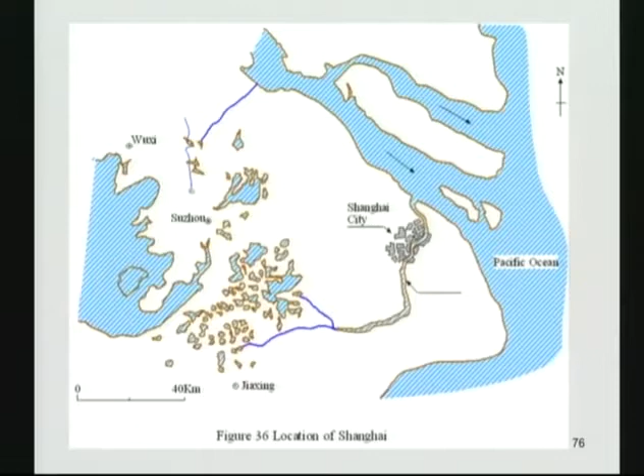This is the Yangtze River, and this is the river. Shanghai city is located here, and the World Fair was operated here. That was the story of 2003.

This is a subway line construction on the left bank of the Huangpu River. An accident took place here; this is the opposite picture. I'm sorry, the lower portion indicates the north. The subway construction was completed here, and there was a connecting corridor.

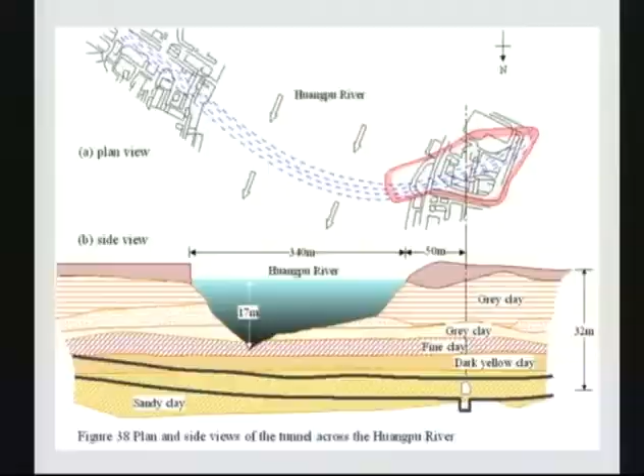The material consists of gray clay, fine clays, all the way down to a depth of 32 meters. The local people told us that the material is the same.

This picture shows a rough diagram I quoted from the figures they provided to us. According to their account, the construction of the tunnel was completed, and at the same time the corridor was constructed together with the ventilation shaft.

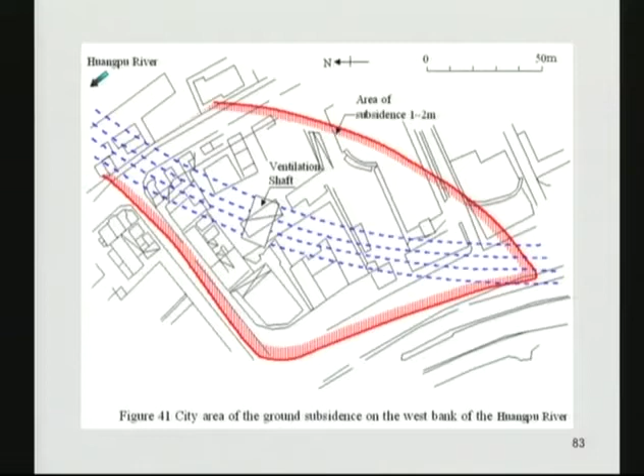So this is the more enlarged area. This is the northern direction. This is the ventilation shaft. These are the two lines. Now it is okay. We visited the site two years ago, and I looked into the ventilation shaft from the ground surface. Everything is fine, and the subway is now in operation.

So, in the collapse scenario, malfunction of the ground freezing method is said to have triggered the collapse. A thick alluvial deposit of silt and sand in the Shanghai district is conceived to have characteristics vulnerable to piping and flow-type failure.

A general concluding remark is written here. In the case of collapse at Nicoll Highway in Singapore, the presence of a buried valley at a depth of 30 to 35 meters was not clearly identified in the feasibility study stage, with boring data at an interval of 20 to 30 meters. In addition, soil properties near the top part of the underlying seemingly stiff layer were not investigated in detail, resulting in an unawareness of less stiff soil deposits existing there.

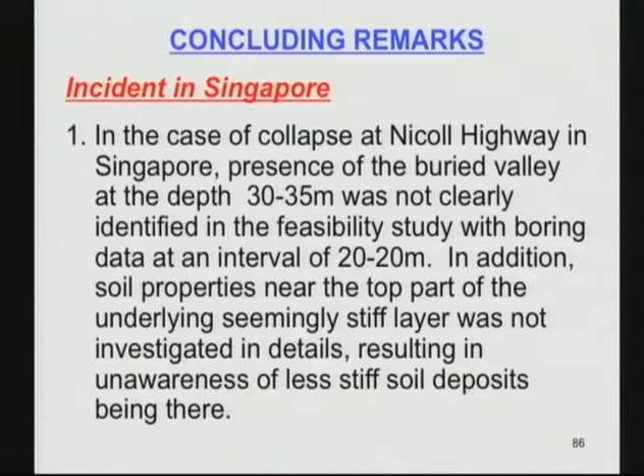Thus, the depth of embedment of the diaphragm wall into the sufficiently stiff layer was short. This situation appeared to have led to lateral displacement of the toe of the diaphragm wall, leading to upheaval of the bottom of the excavation. This upheaval must have caused the uplifting of the king post and led to the offset at the joint between the strut and the wall.

Incident in Kaohsiung: in the case of caving of the ground at Kaohsiung, piping occurred when open excavation was underway at a depth of 34 meters. The nature of the local silty sand was shown to possess peculiar characteristics, in that the silt-sized particles could be detached easily from the skeleton composed of larger particles. This particular nature of local silt, having high susceptibility to internal erosion, must have a critical hydraulic gradient much smaller than that normally encountered in silt in other areas of the world.

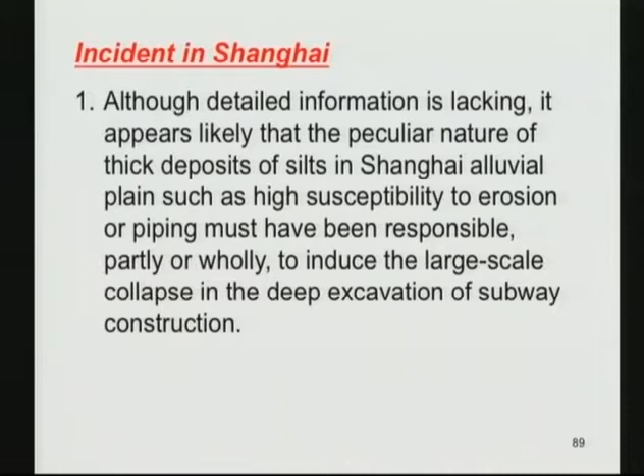Incident in Shanghai: although detailed information is lacking, it appears likely that the peculiar nature of the thick deposit of silt in the Shanghai alluvial plain, such as high susceptibility to erosion or piping, must have been responsible, partly or wholly, for inducing the large-scale collapse in the deep excavation of subway construction. So, as a whole, we can say that close examination of the topography of buried valleys and thick alluvium, and property characterization of the base layer, should be made.

Characteristics of local soils or silts with respect to seepage instability is an important factor to examine in detail. Soil investigations are shown to be by far more important than anything else for reducing the risk of construction and for implementing cost-effective construction works. This is the end of my presentation. Thank you. Do you have any questions?

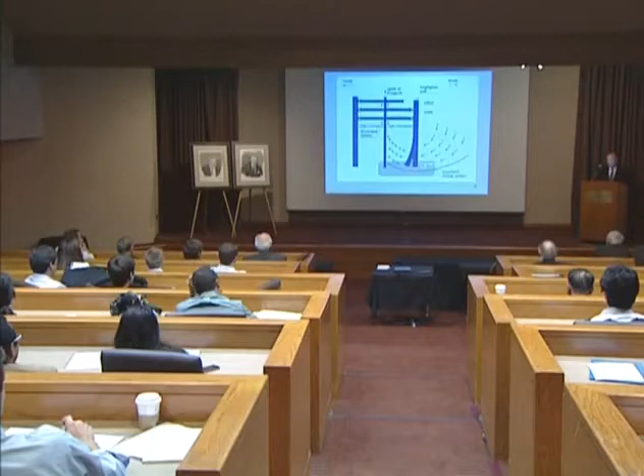Structurally, will that help? Yes. Now that we have this slide, I want to see if it's possible to have a vote. Who would vote for A and who would vote for B? Because I voted for one of the two from the first few slides, but I'd like to see the opinions—maybe there's a case B, case C too. So these are two questions: a vote, and second, whether bracing in the vertical direction would have helped.

You mean bracing in the vertical direction, in this one? Correct, as you excavate, you brace with this. Correct, so that the differential movement between the enclosed area and the side perimeter walls would be stiffened. Yeah, of course, because what happened is this differential movement caused a P-delta effect on the struts, which failed, and then one side collapsed and the other followed. Yeah, that's correct.

If this box inside was very solid, or solidified with a few extra bracings, I think the failure would have been more local. That's my opinion. Okay, yeah, that is a kind of design issue.

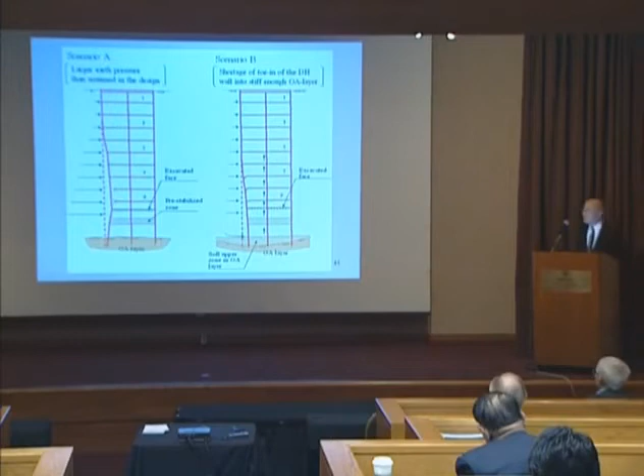Normally speaking, this spacing is about 2 to 3 meters, and king post distance is about 10 meters and so on. So the arrangement of the temporary supporting structures has been designed based on conventional procedures. There had not been any dispute about the number of supports and also the king post arrangement. However, there is another opinion—as you can see, there were curvatures, like this, and this kind of thing might have helped induce the collapse. But we don't believe this contributed so much.